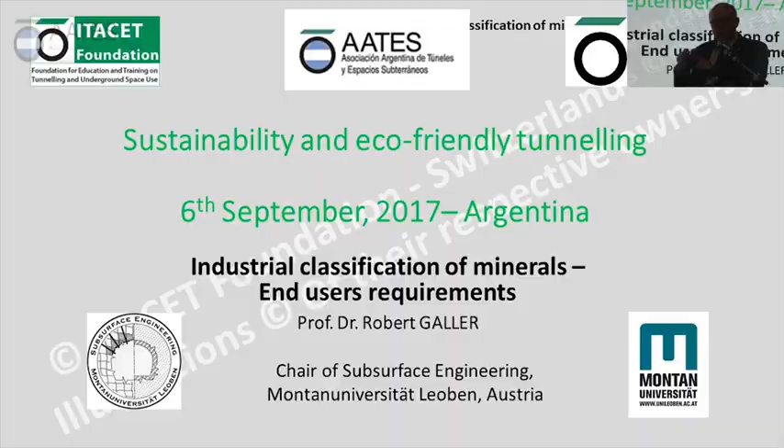Now we are coming back to techniques, the industrial classification of minerals. The question was, if we want to bring this waste to the industry, we have to be clear what is the industrial classification, where it goes into, and is it possible to produce something out of this material.

First, what we had to learn is it is a highly interdisciplinary task. There are so many interests which have to be combined in this sector. One is the government. Why is the government interested to keep it as waste? It depends on which ministry you are going to.

There is an environmental ministry, and the numbers I told you, about 100 euros per ton, is the amount which goes directly into the budget of the ministry. So they have no interest to get out of it. The other is the ministry for constructing tunnels or infrastructure. They would be highly interested to get out of it.

We, outside of the ministry, ask does it really make sense to transfer the money from this ministry to that ministry? But our view maybe is not big enough to understand what's going on behind it. There are different interests from different ministries. There are NGOs. NGOs want to see that we are going in an environmentally friendly way, following all this European legislation.

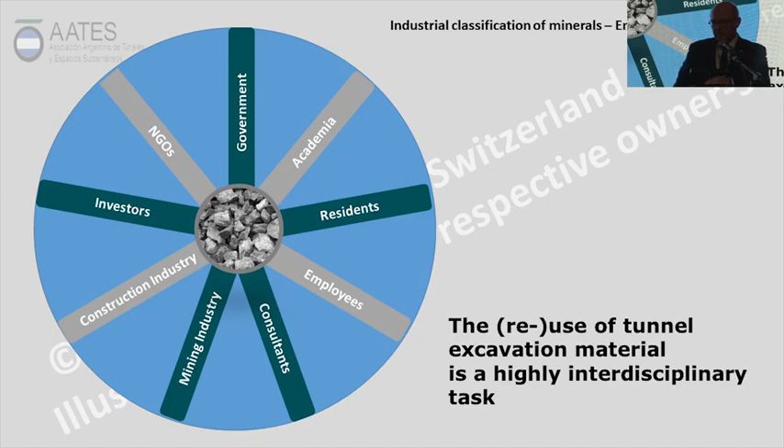I would say the designers, for the moment, did not follow these new developments of environmentally friendly aspects in the design. We need the next generation for that. The older designers are focusing on UCS, friction angle, Young's modulus, static, okay, fine. Of course these are different aspects, and that's why it's really hard to shift the topic further.

I mentioned an almost similar slide also in the morning. There are technical aspects to be considered, geological ones, legal ones - this is the hardest - and economic ones.

Technical aspects: now, if you do it with drill and blast, you must be clear that you bring chemicals from the blasting into the excavation material. And you have to have a site organization who can handle that. You need somebody who detects what is the chemical composition of your excavation material. You need somebody for that.

You need, for the moment, big places to store your excavation material until you know what is in this big mass of excavated material. Before you know exactly what it is, you will not be able to deposit it here or there or bring it to the industry. So our problem is the analysis, which we have to do following all this legislation, takes a lot of time, on average two weeks. So you can imagine, you bring out your excavated material, you have to store it intermediately on a place until you get the results from the laboratory so that you can bring it anywhere.

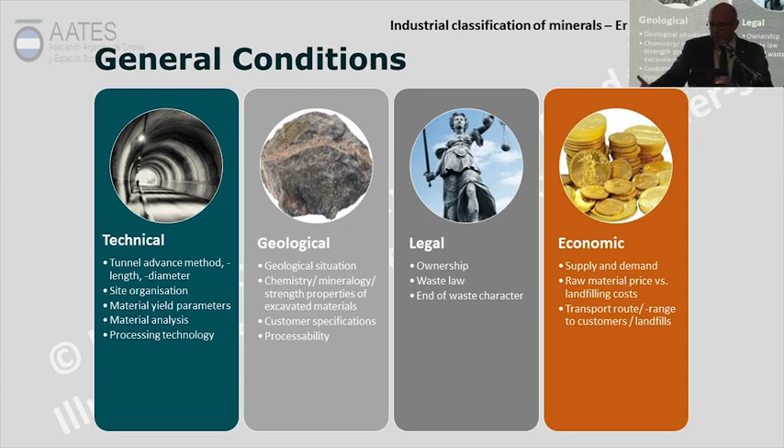If there is no industry near your construction site where you can sell it, then it gets completely out of interest for anybody to transfer your excavated material to this industry. So it must be economic at the end.

The slide I show you here is just to give you a feeling that we can, and the mining industry does, use excavated material—simple example, limestone—for many reasons. For example, limestone is needed for producing soda. Limestone is the basis for gypsum products. Limestone is also the basis for ethyne, which is a chemical substance. It's also a basis for slaked lime products, for the cement industry, and of course for building materials.

And limestone, I would say 50% of our projects consist of major parts of limestone, but for the moment, it's just deposited.

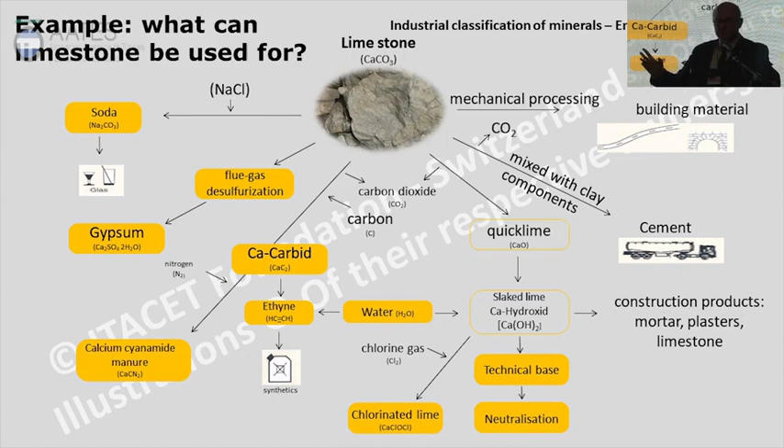The rows you see here—granites, acid vulcanites, basic vulcanites, limestone dolomites, marble and metamorphic rocks—are the most common lithologies in our area. If somebody says, what should we do with that? Please have a look at the mining industry, what they do in Austria with these materials. We have mines for all of these lithologies, and the columns show what they do with it. So everywhere you see a colored area, we have, for example for granites, aggregates for concrete. So why are we then bringing our granites to the deposit? On the other hand, we have a mine very close to the construction site and bring it there. So there are different possibilities to use it.

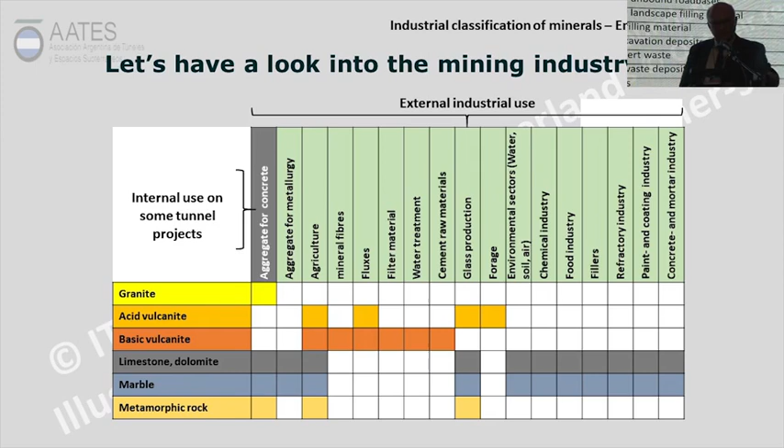This brought us together with the ministry in 2015 to the point that we wrote a guideline for what has to be fulfilled in future, and we did a separation of typical industrial products, which now have numbering, as you can see on this slide.

What the design consultant must do is not optional—it's a must. In a preliminary stage he has to make a plan where he says: this material from my exploration will be this, and could be used for that. He has to assign one of these H-numbered uses. And if he says this material cannot be used for anything, then it gets a D, standing for deposit. It's his duty in the earliest stage of project development to make a plan like this.

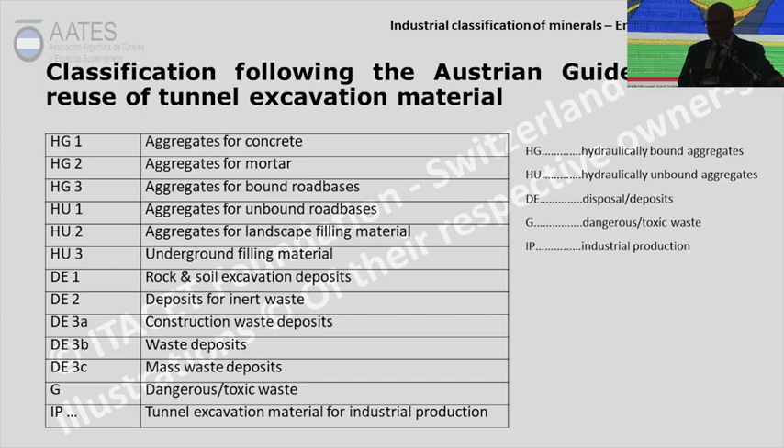What you can now maybe hardly read is that the lines following the longitudinal section are the H names, meaning this is a possibility of industrial use. If he gives it a red color, he says it cannot be used for this. If yellow, it could be, depending on consumption conditions. If green, he says it's for sure possible to make this industrial product out of this material.

The design consultant does not have the duty to say it's economic. He should focus on whether it is technically possible, yes or no. And he has to do that for all possible products written in this guideline, which is very broad.

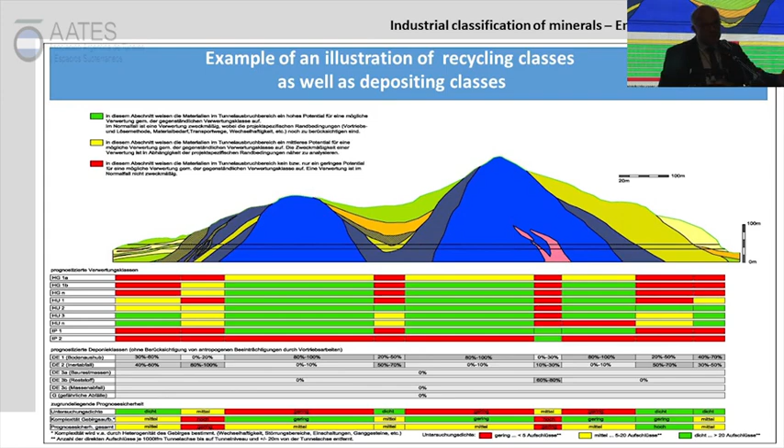And it is focused not on statics, not on anything, but just on resource efficiency, environmentally friendly tunneling. And this is a must in every contract. So we force, so to say, the client, but also the design consultant, to do something on that.

Now, we have aggregates for concrete production. I don't want to go too much into the details. You get the slides, I think. For example, the guideline says you have to do a laboratory test with the material, uniaxial compressive strength. For concrete production, our experience is that the material has to have at least 40 megapascal. If it is lower, you cannot use that material for concrete production.

So that the design consultant gets numbers, okay, I can use it or I cannot use it. So he has a guideline he can look into. This is of course just a short excerpt of this guideline, there is a full list. He should test the E-modulus, Young's modulus. The quantity of samples he has to have is 30 tons, by the way. This is written in the guideline. If he doesn't have 30 tons of material available, we say it's not sufficient.

Of course, the material has to be taken from a lithology which you find on the surface, because 30 tons from core drilling is a little bit hard to get. So 30 tons is the minimum requirement for each lithology. This is very clearly stated, and if the client doesn't allow that, he can give a red light and say the client has no interest in that. Sorry, I cannot.

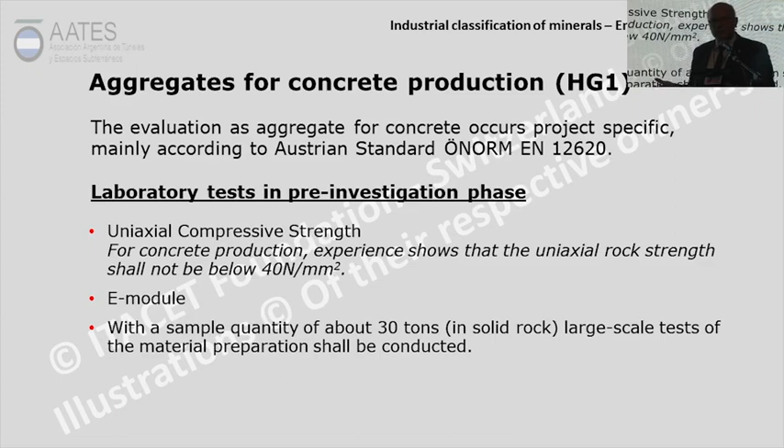Just an example, the Gotthard Base Tunnel, which was 2 tubes, 57 kilometers long, had 28 million tons of excavation material. The mineral resources used for concrete production were 6.5 million tons. And in all, they produced 3.3 million cubic meters of concrete. I would say this is a first really good example where they did it. And what we liked very much, the client took full responsibility for whether it is possible to make this concrete out of the excavation material. In percentage, and this is already long ago, 23% of reused material. This is a high amount.

The Lötschberg, 2 times 35 kilometers, total excavation 16 million tons, mineral resources used 3.8, concrete 1.9 million cubic meters, 23%. Lyon-Turin is not built, but they have already started. Again, 2 times 57 kilometers, total excavation volume 30 million tons. It is foreseen that 9.7 million tons be reused to produce 5.5 million cubic meters of concrete, which, if possible, would be 28%. So this, I think, drives in the right direction.

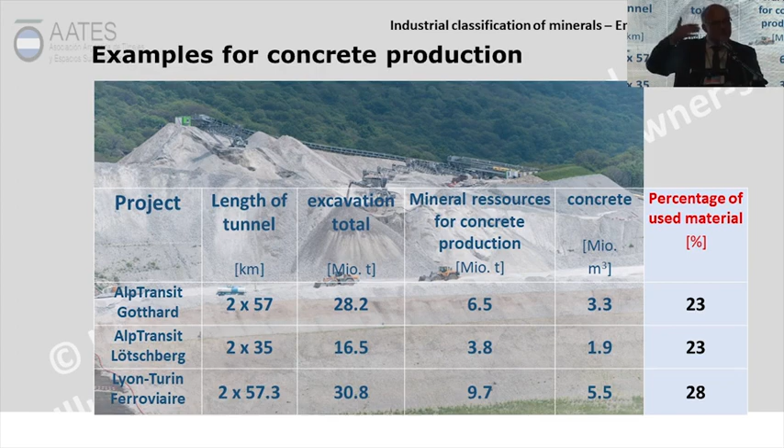Another example, if we take the Gotthard again, suitable for concrete production would have been 36%. And out of this 36%, as you see, they used 29 for concrete aggregates. 2.5 was even supplied to third parties. This we would like to increase, bringing this material to the industry. Losses during processing, 2.5%, and sludge which had to be deposited, 2%.

Their own usage for embankments was 19.6, landfill recultivation 30%, fill material for third parties 14%, and the repository, because this is the most awful waste, 0.4%. This is the most expensive.

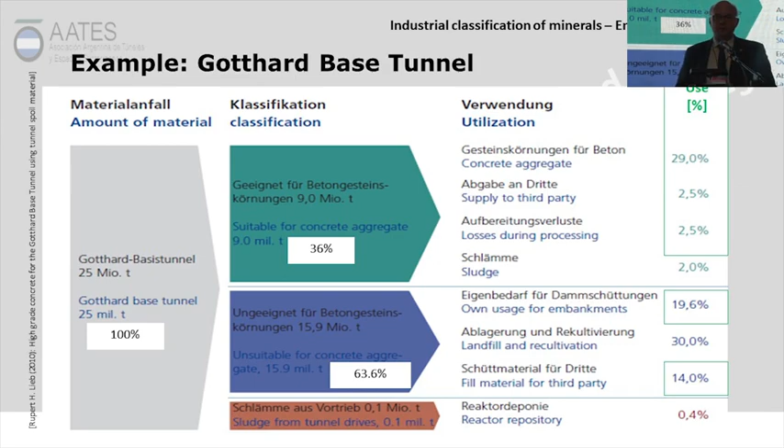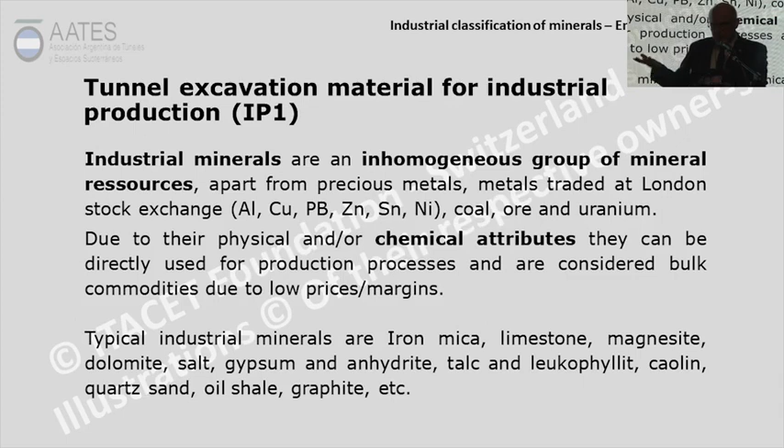As time is running, I don't want to go too much into the industrial production. On this slide, there are elements which the industry requires, depending on the industry, which we have to check. And we set up a database which works like this. Our university is a little more than 175 years old, and mining and mineralogy were done there for years. And these colleagues wrote down which geology contains which minerals, which contain which chemistry. So we have books available on geology and the elemental distribution in this mineralogy.

And as it is a mining chair, they said, okay, we check with all the industries what the requirement is from each industry. There are books. For example, you would like to produce steel. What kind of raw materials do you need for steel production? You produce glass. What kind of minerals do you need for glass production? And.

What we did now is we put everything in a database. So we put the geological information and the industrial information in a database. So what we can do now is, if we get a chemical composition of anything, of the excavation material, we feed it into the database, and the database can tell me this material is good for that.

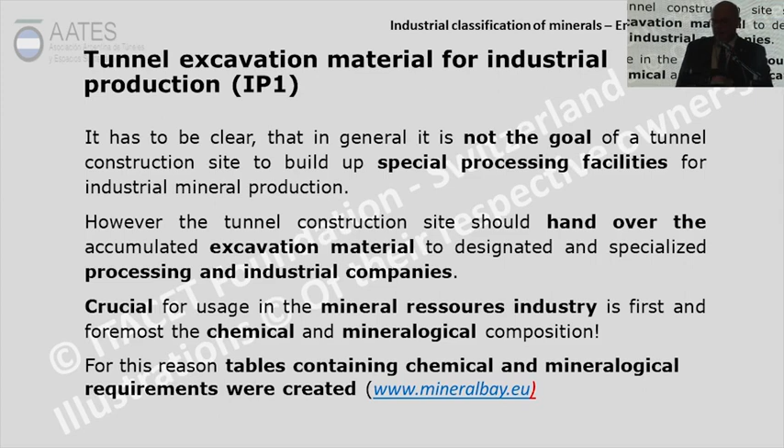Now, working together with the mining industry, we learned that we have to categorize. We made 3 levels. Level 1 is, from this excavation material of the tunnel, it is very easy to produce this product. You just break it down, crush it, wash it, and make a concrete out of it. Easiest way. Level 2, your excavation material is medium easy to manage because you require already a little bit more processing.

And level 3, even if the database says, yes, you can produce steel out of it, it is so hard to produce it because you need a manufacturing unit, you need processing units which you will never have on a construction site. Then we put a red light to it and we say, okay, the material would be good, but we will never set up a processing unit on the construction site with this. These are the 3 levels.

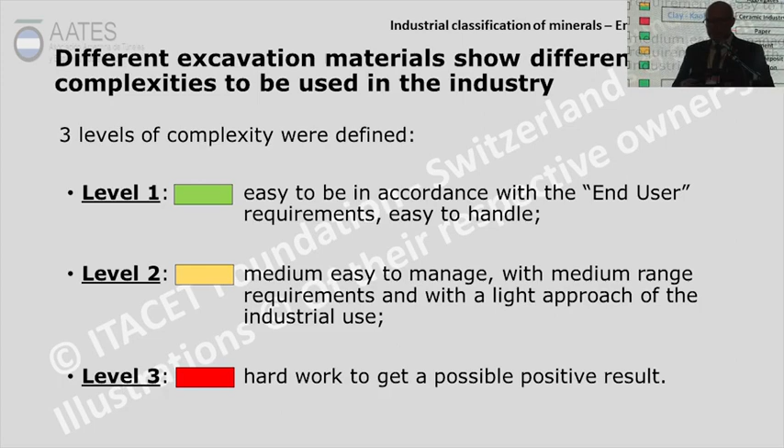And now, just an example again. For example, limestone. Limestone can be used for pig iron. We gave it a red light because we will not start to produce the components for pig iron on a tunnel construction site. What we could, let's say, imagine is that we give these to somebody who produces pig iron. But it's much too complicated to do it on a construction site.

Calcium carbide, a yellow light, it is an effort to do that. And if you have just little mass, it will not be economic. Glass, red light, for example. Cement production, green light, it's easy to bring it in a form that you hand it over to the cement production. That's how we did it.

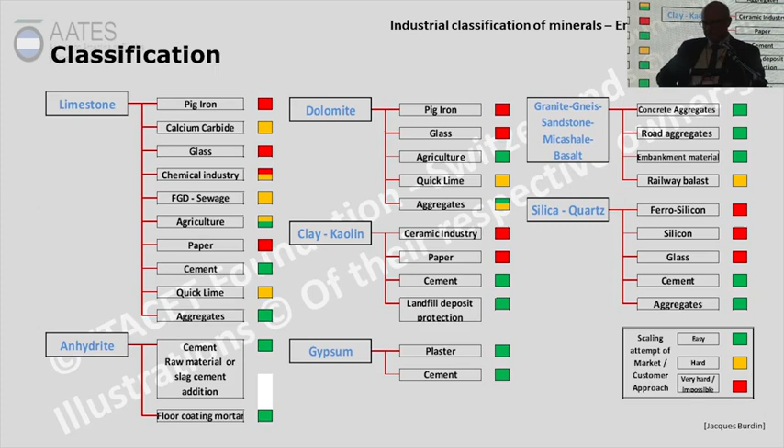So the database tells you this can be made out of it, and then a categorization from green, yellow, red can be done with an effort which you can do on the construction site, or it's better to hand it over to a mining processing unit. Just examples on this classification chart.

To make you a little bit familiar with this, what is the industry telling us? For example, polymers. The polymers need limestone. And then it says limestone is not limestone. Limestone consists of CaCO3, calcium carbonate, CaO, calcium oxide, and then everything is in limestone. And the industry gives very clear ranges from to where you can use it for producing, for example, polymers.

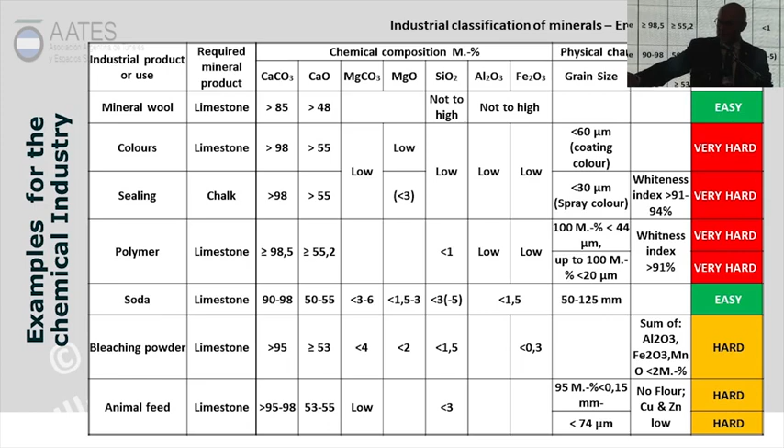And the database has already incorporated all these ranges so that the database now tells us, okay, can be used for polymers, yes or no, or can be used for sodas. These are just examples which are given here. And treatment effort, hard, easy, or very hard.

Now, I mentioned already, economy plays a major role. We tried to do that with a project in the French part of Switzerland, and the outcome was the blue line. It is very much depending on how much you produce. Because you have to buy your processing units, a sieve, a crusher, a washing unit, whatever. And the more you produce, the cheaper the ton gets.

And in the easiest processing, it's the blue line, and in the hardest processing, it's the upper line. And then you can have a look how much is the material which I have to buy from the mining. If the mining is outside, then it makes sense to do it yourself. It was done on a Swiss project, and you know the Swiss have almost nothing available for mining. There is no mining anymore.

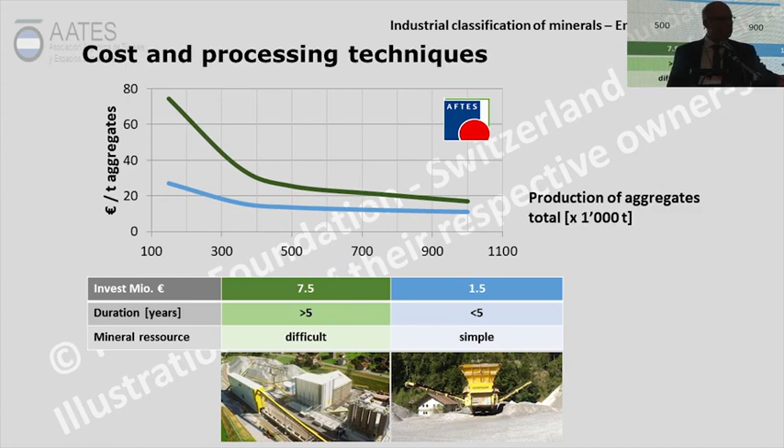So in the Swiss area, for example, it would make sense, if it would be allowed, to transfer the excavation material from the Brenner base tunnel, which is 200 kilometers away from Switzerland, to Switzerland. And we would even make a business, but it's legally forbidden.

Now, of course, we have to make a quality assurance. And how is it done nowadays? Nowadays, we do it by point load tests, these tests I mentioned already before: point load test, microscopy in the laboratory, breakability tests, and so on. They take their time, and bringing the results back to the construction site is, in our view, too slow.

That's why we did a European project and developed things which can give you the information on the excavation material online, and we produced prototypes for that. For example, together with the company Herrenknecht we developed a disk monitoring system. So we bring monitoring into the disk of the cutter head. This disk now measures the hardness of the material on the face, a kind of UCS, where we say UCS is the wrong value, by the way, but it gives you an indication of how hard the material at the face is.

Then we developed an automated analysis, which I will show you in the last of my presentations, for elemental chemical analysis. The material is running on the conveyor belt, and you detect what is on the conveyor belt by automated analysis. So you don't have to wait for the laboratory tests, because the minute it is running on the conveyor belt, this detector says this is the elemental composition. And some others which I will speak about afterwards.

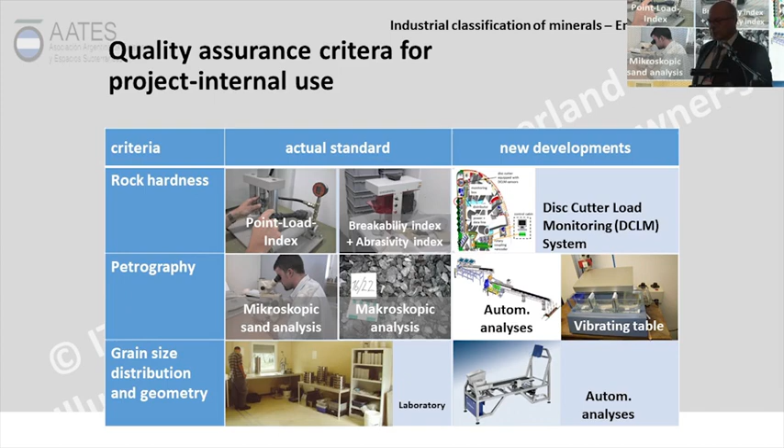We think this could be a driver for the construction industry, because they know what the material is at the moment they do the tunnel. They don't have to wait the 2 weeks for the results to come back from the laboratories.

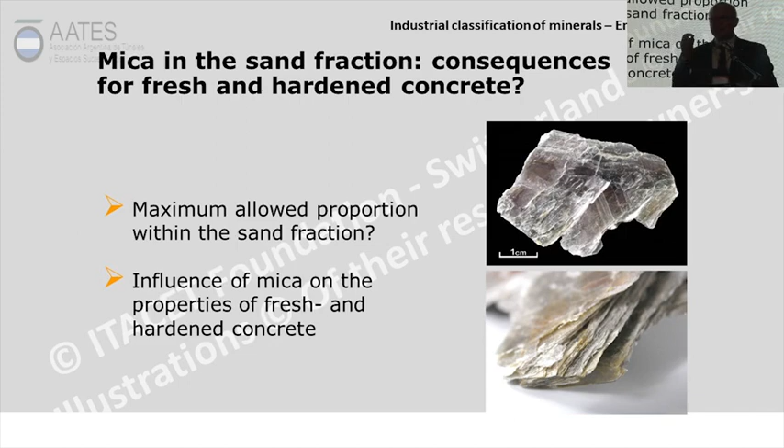One of the hard points is mica, because mica often prevents us from using it for concrete, since it brings the strength down. But mica is not mica, and that's why the regulation of the European Union is good to standardize the test. You see here a chart of the mica content of different lithologies from the Gotthard base tunnel.

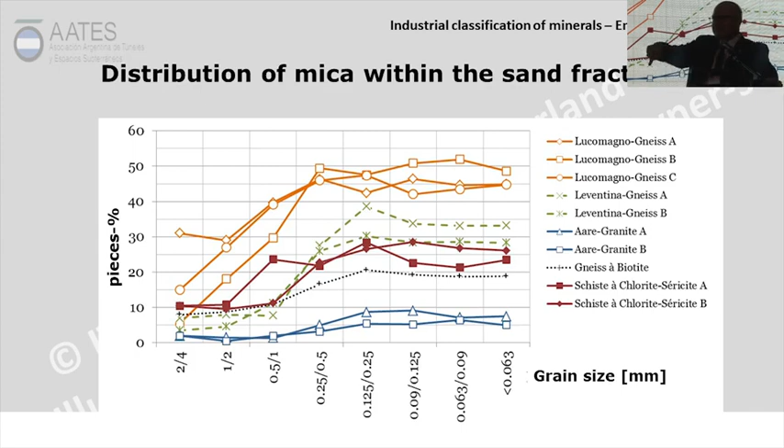And you see that the mica content depends on the grain size where I measure the mica. If I measure the mica content in a grain size between 1 and 2 millimeters, I have almost nothing. But if I measure it in the fine-grained material, the mica goes up, because the mica collects in the fine-grained fraction.

For example, here we have the mica content in a 0 to 4 millimeter sand, and the mica was measured in the fraction 0.25 to 0.5 millimeter. The Austrian standard, for example, says we measure the mica between 0.125 to 0.25. This is another section than the Swiss use. So we cannot compare the Swiss and the Austrian results on the mica content, which is essential.

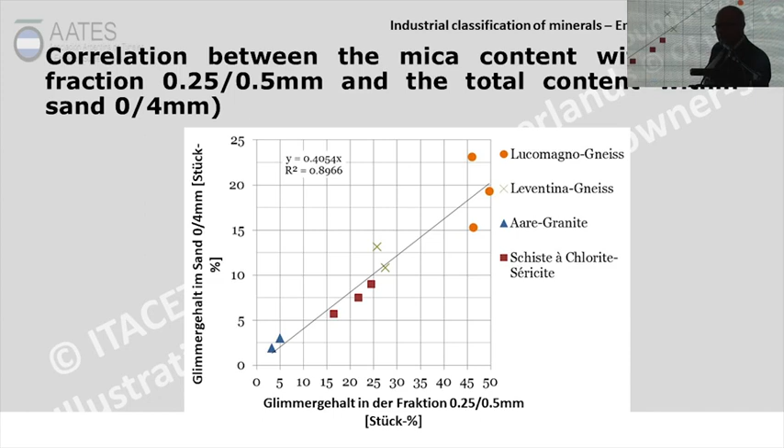The construction company asks us, can I use this for concrete production, yes or no? You can use this product in this range of mica for concrete, but you couldn't use it if the mica is up there, because it gets much more difficult to pump the concrete, and you cannot reach the strength. That's why it was fixed that the mica content must be lower than 35 percent, measured in the range 0.25 to 0.5 millimeters.

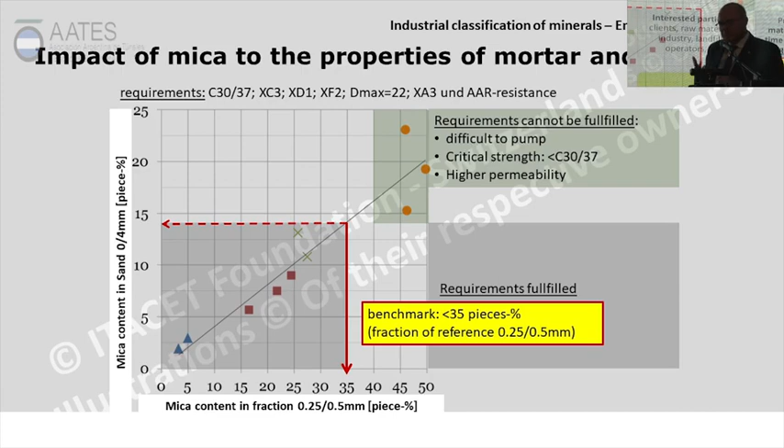And all of this information is essential, because sometimes I hear, okay, I have 40% mica. What is it? Volume percent, mass percent, piece percent? No information. Where did you measure it? No information. But this is essential. That's why the standardization the European Union gave us is good, because then it's clear we have to measure it in this range, and it is not volume percent, not mass percent, it's pieces percent. This is good.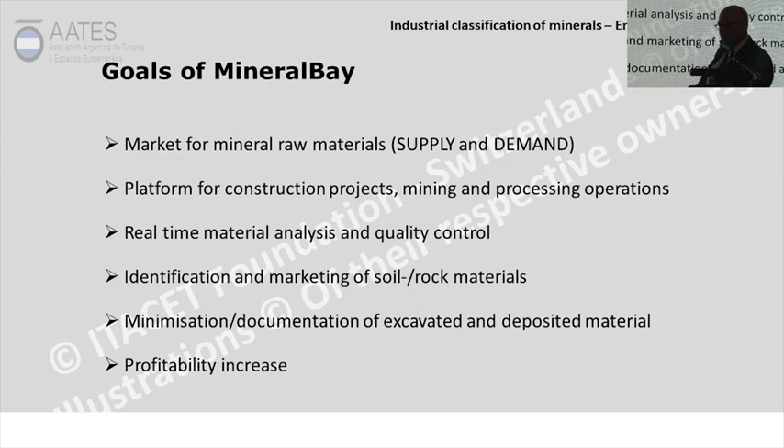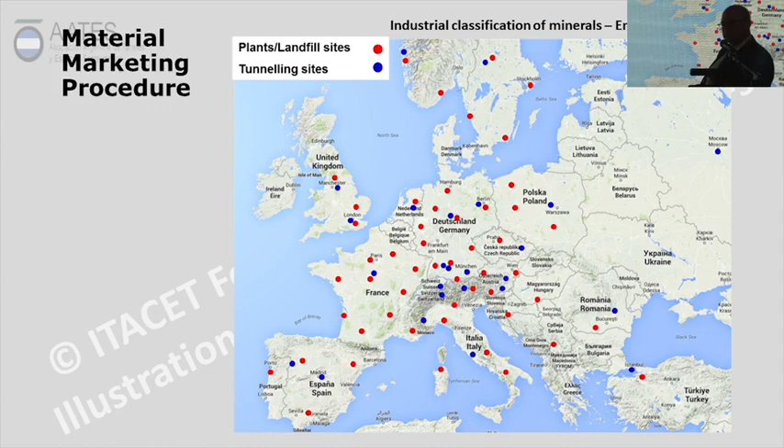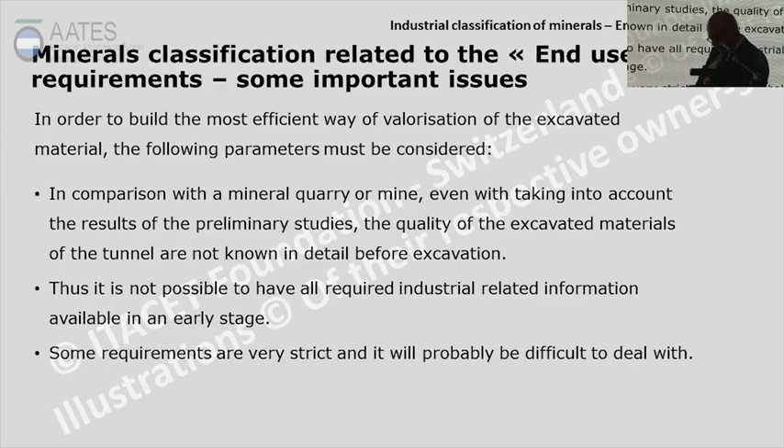MineralBay, the database, I go over because of time; it is a database you can use as I described before. Just to give you an overview, the red points are the plants, the industries using minerals, and the blue are the tunneling sites. You see from these charts the industry is not so far away from our tunneling construction sites. So why shouldn't there be a chance to reuse it? I go over that because of time.

I would say there is a possibility to use the excavation material, but it must be driven by the designer. The designer must give the design consultant the opportunity to check all of that. The design consultant has to get the knowledge in the offices, because there is a learning procedure nowadays. It will be the younger generation who will work on that. I would say just do it. There is a chance to do it. That was my presentation on that, and one more follows.